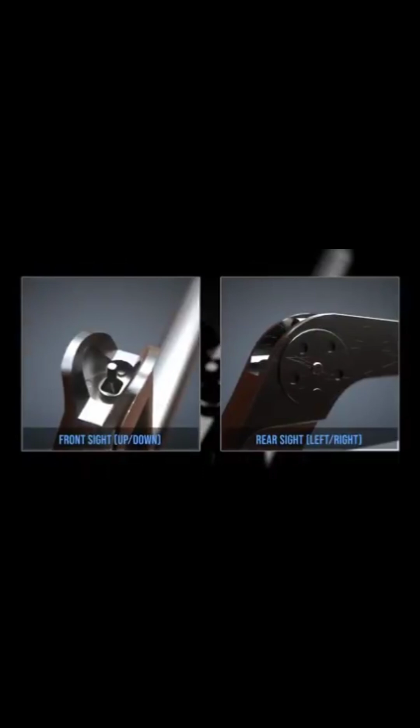A low-light level sight system for the M16 was also available. It featured a rear sight with a larger aperture of 7mm and a front sight with radioactive tritium for visible light at night. Newer versions have been equipped with a low-light level system and an elevation knob for better targeting.

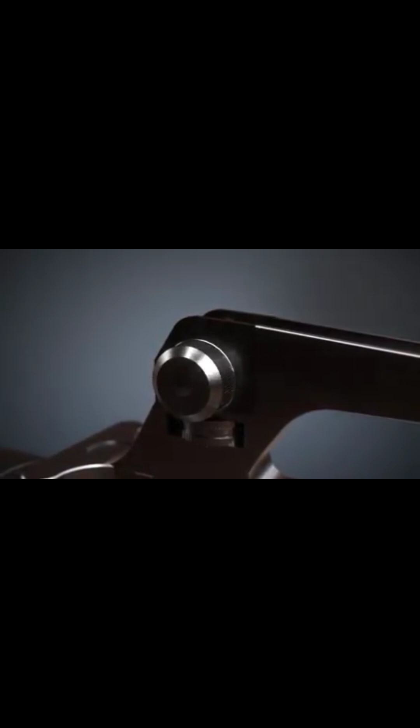Today, a lot of accessories are available for AR-15 style rifles. Fluted barrels save weight and dissipate heat easily.

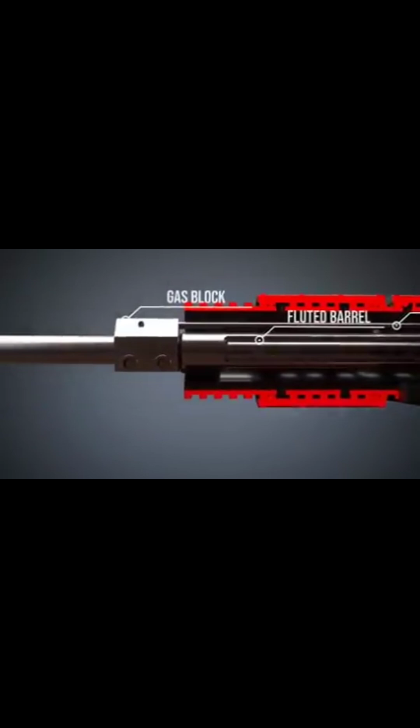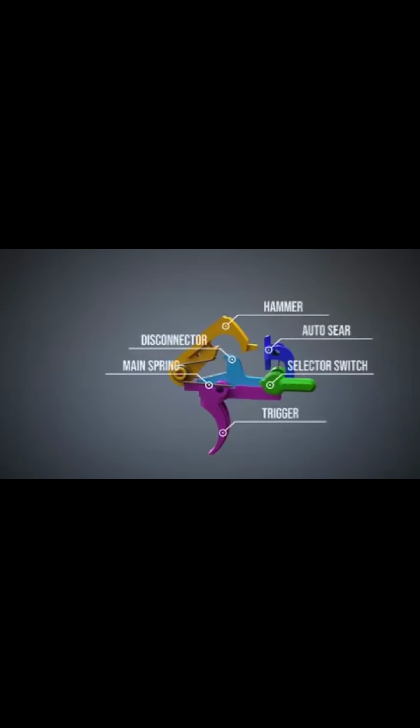Let's have a look at the M16's trigger mechanism. Initially, the M16 assault rifle could fire in semi-automatic and fully automatic mode. When in safe mode, the trigger cannot be pulled because of the selector's shape. When the selector is moved to semi-automatic mode, the recess in the bottom of the selector allows the trigger to move when it is pulled.

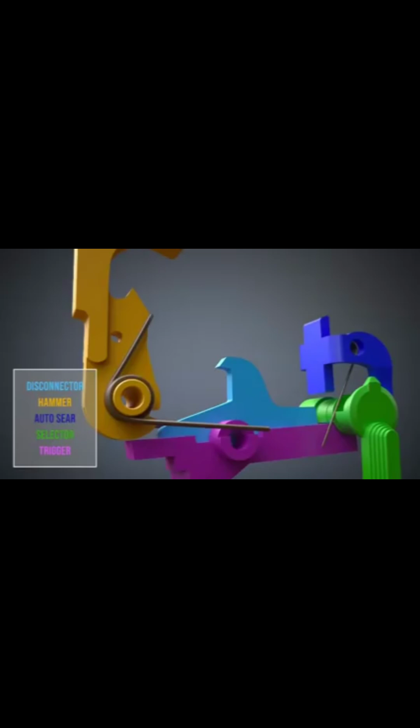As soon as the trigger is pulled, it releases the hammer. When the bolt carrier pushes down the hammer, the disconnector locks it in place. Before another shot can be fired, the trigger must be released so that the trigger sear engages the hammer again. In fully automatic mode, the trigger can move freely, whereas the disconnector stays at its position.

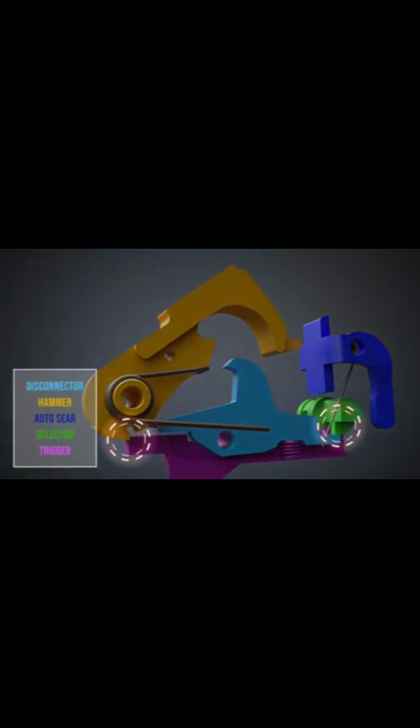The selector has a recess for the auto sear. The auto sear catches the hammer when the bolt carrier moves backwards. When the bolt carrier moves forward to chamber a new cartridge, the bolt carrier pushes the auto sear forward, releasing the hammer.

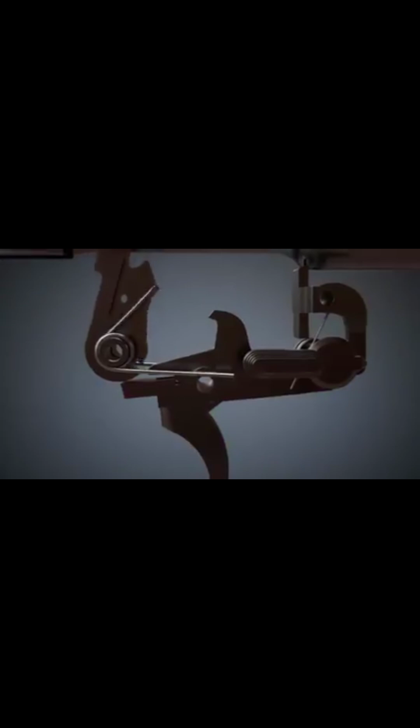Now, let's have a look at the bolt carrier. The bolt carrier houses the bolt that has several locking lugs, which are also called bolt lugs, and a cam pin. When the hammer strikes, the firing pin is pushed forward. The firing pin hits the bottom of the cartridge, which consists of the case, the propellant, the bullet, and the primer.

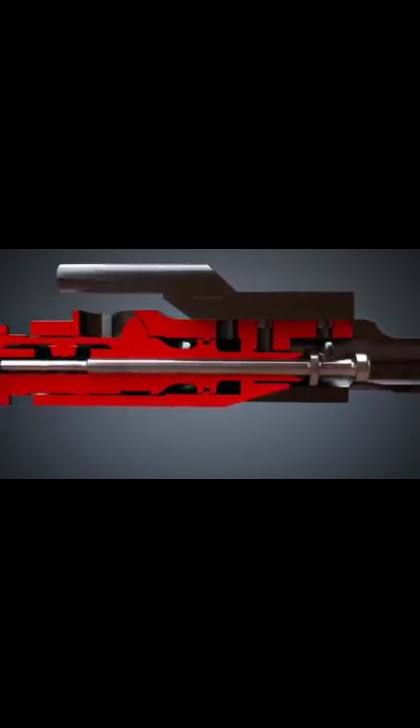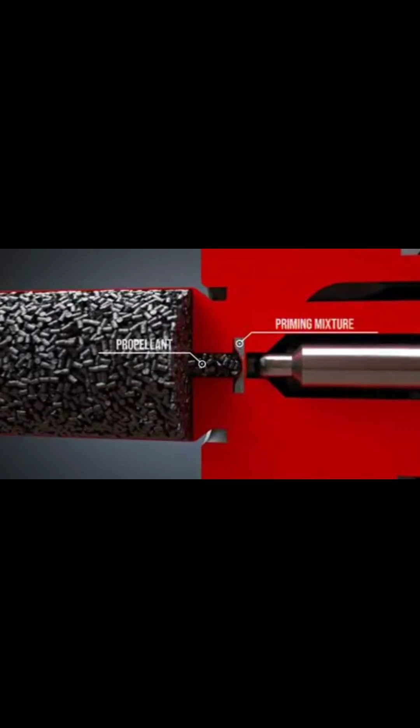The case of the cartridge is filled with the propellant. At the bottom of the case is the primer. The primer holds the priming mixture. When the rifle's firing pin strikes the primer cap, the priming mixture explodes, resulting in the ignition of the propellant.

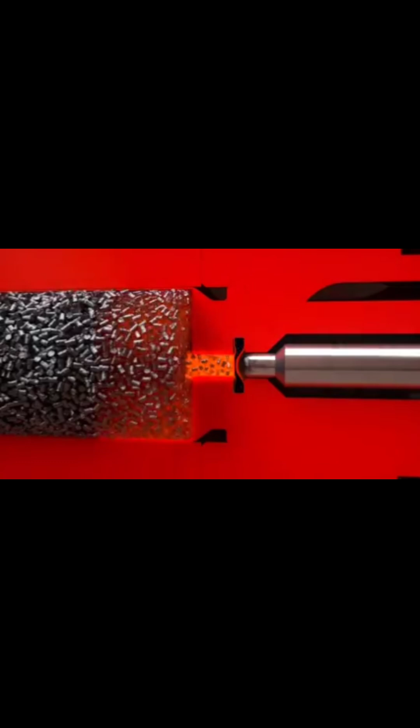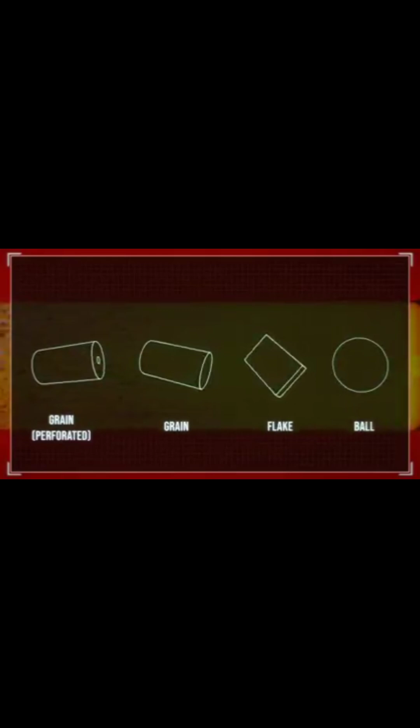The propellant is available in different shapes and mixtures. It is usually smokeless powder that reaches temperatures above 2,000 degrees Celsius. The pressure in the case pushes the bullet out of the case through the barrel to the target with a velocity of around 1 kilometer per second.

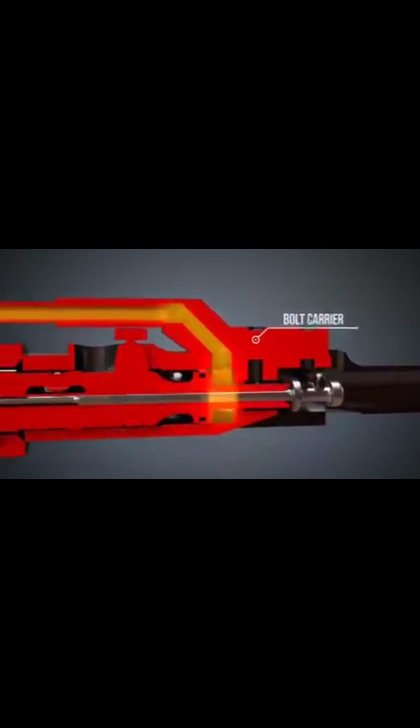The gas block and the gas tube connect the barrel with the bolt carrier. The pressure provided by the propellant is transmitted to the bolt carrier. Consequently, it is pushed back. The bolt is unlocked and moved backwards by the bolt carrier by means of the cam pin. The extractor removes the spent case from the chamber, while the spring-loaded ejector ejects it.

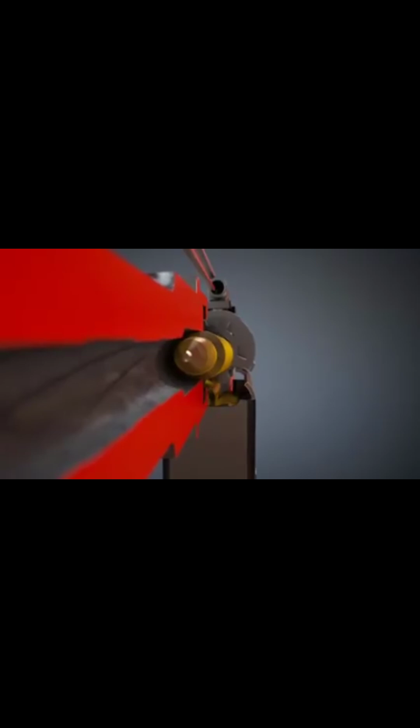The buffer spring is compressed and ready to release the stored energy. Consequently, it will push the bolt carrier back to its initial position. The bolt chambers a new cartridge. When the cartridge is fully seated in the chamber, the bolt is locked through the rotation. Let's see it again from another perspective.

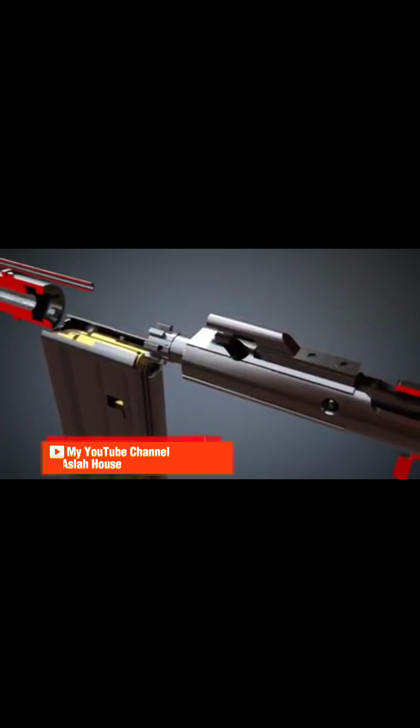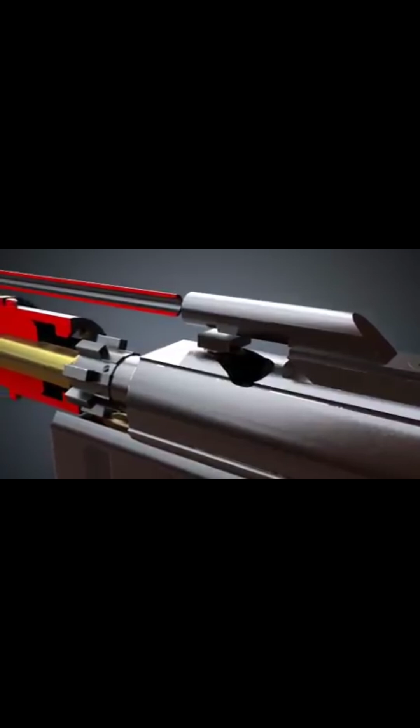The bolt pushes the cartridge into the chamber. When the bolt cannot move any further, the bolt carrier rotates the bolt through the cam pin. That way, the firearm can withstand the high pressure created by the propellant when the gun is fired. Let's see again the locking mechanism.

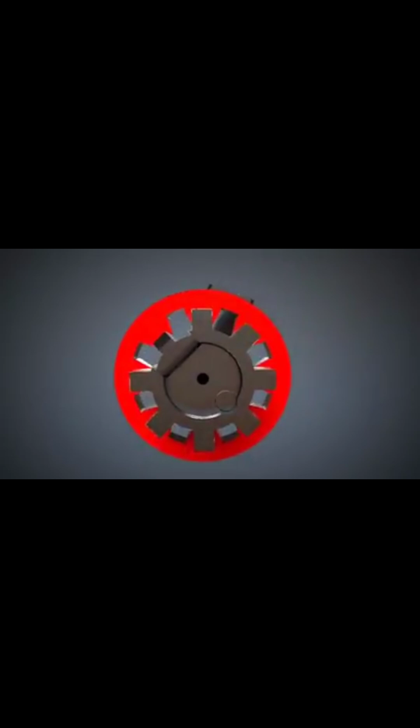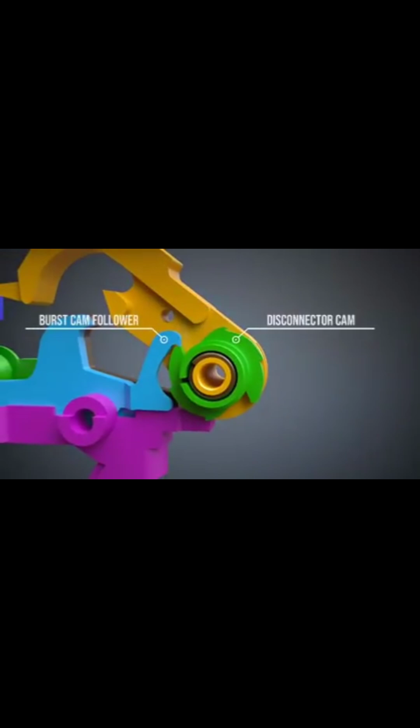In fully automatic mode, the rifle would release the hammer and fire. Because many soldiers would fire in fully automatic mode and waste ammunition, the burst mode was introduced. When the trigger is pulled, only 3 rounds are fired. This is possible through a spring clutch. The diameter of the spring clutch gets smaller or larger according to the direction of the force.

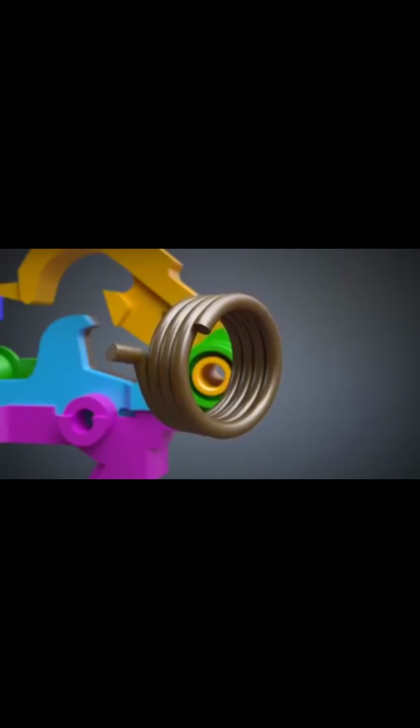So, when the trigger is pulled, the hammer strikes the firing pin. When the hammer is pushed back by the bolt carrier, the disconnector cam rotates thanks to the spring clutch. This is done 3 times until the burst cam follower reaches the stop notch. Because the stop notch is deeper, the disconnector holds back the hammer. So, the trigger must be released to fire again. Let's see it again from the side view.

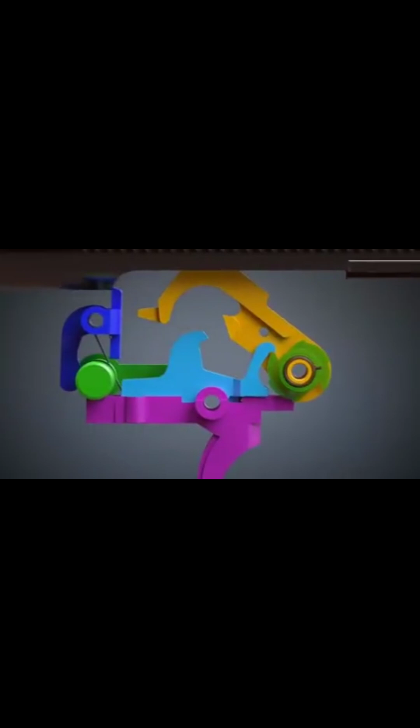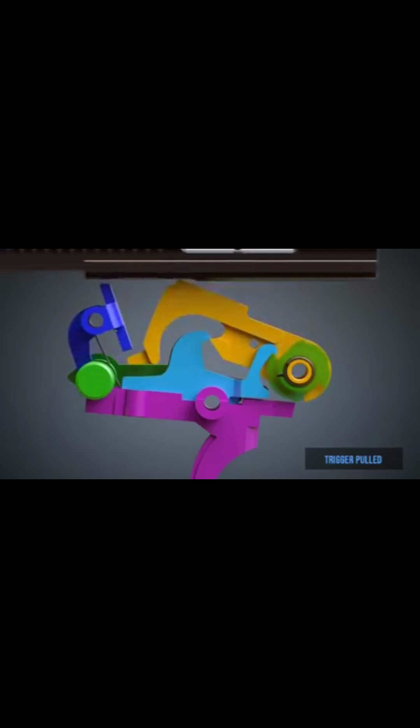The civilian AR-15 can only fire in semi-automatic mode. It does not have parts and recesses needed for fully automatic firing. Furthermore, the lower receiver does not have room for the auto-sear, and only a full auto bolt carrier can trip the auto-sear.

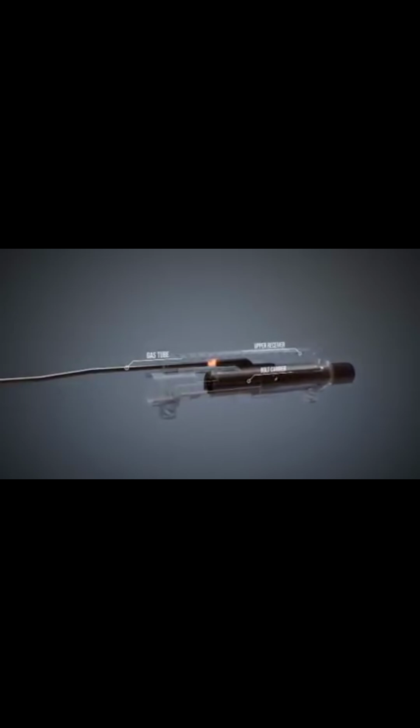The M16 and other AR-15 style rifles usually use direct impingement to cycle the action. So, when the bolt carrier moves backwards, residue can enter the upper receiver and other parts. This gunshot residue can become a big problem when the rifle is not cleaned regularly. Let's have a look at the upper receiver.

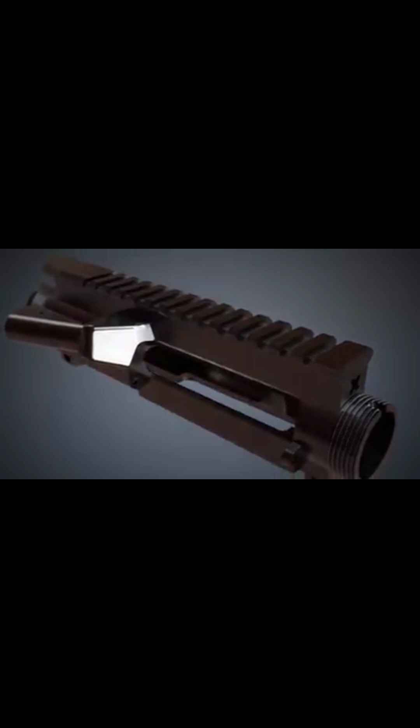When the rifle is not cleaned regularly, deposits can be found on the walls of the firearm's upper receiver over time. This can lead to increased friction between the upper receiver and the bolt carrier, so that the bolt carrier gets stuck and a new cartridge cannot be chambered.

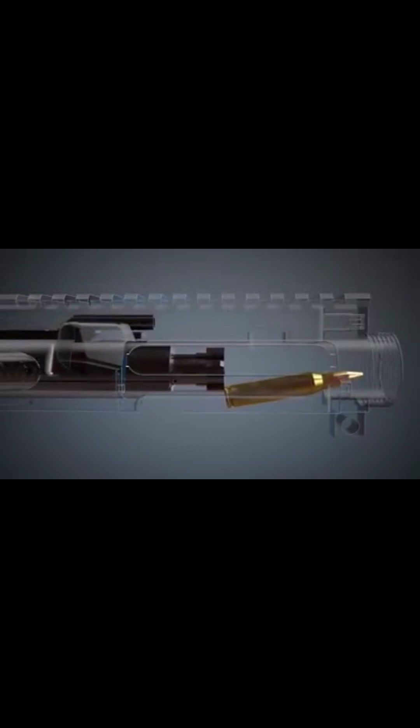Here, the forward assist can help. Pushing the forward assist plunger will move the bolt carrier forward, thanks to the notches. This can be done until the bolt is locked and the rifle is ready to fire.

Flash hiders are common on military rifles. Flash suppressors hide the flash so that the soldier is not blinded in low-light shooting conditions. They do this by dispersing the burning gases so that they cool much faster.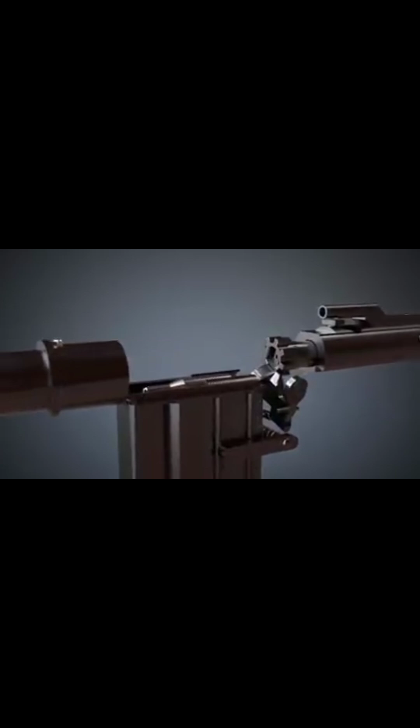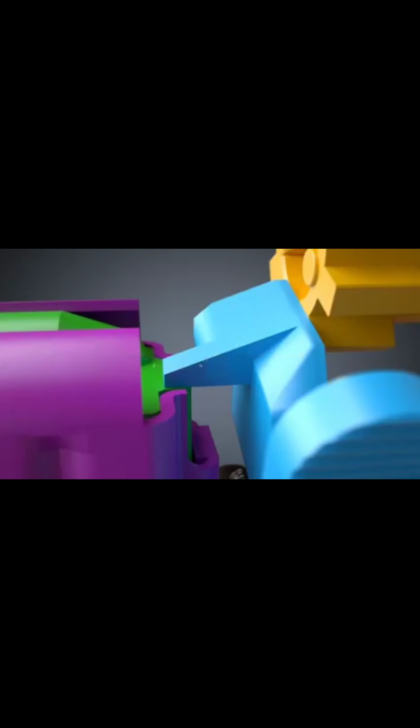When the magazine is empty, the spring-loaded magazine follower, which pushes the cartridges to the top of the magazine, pushes up the bolt catch. By this, the bolt catch locks the bolt. The operator can change the magazine by pressing the magazine catch.

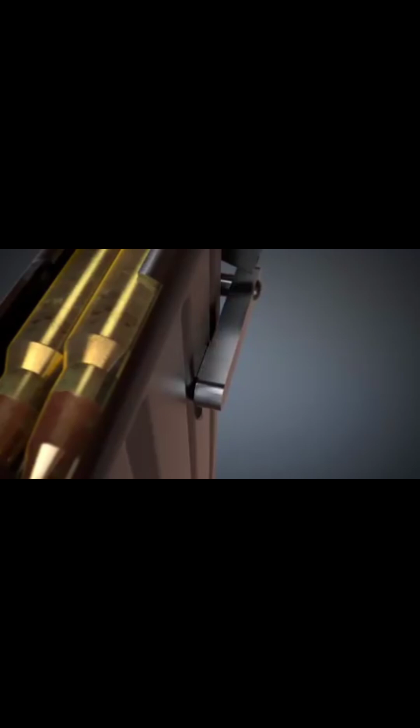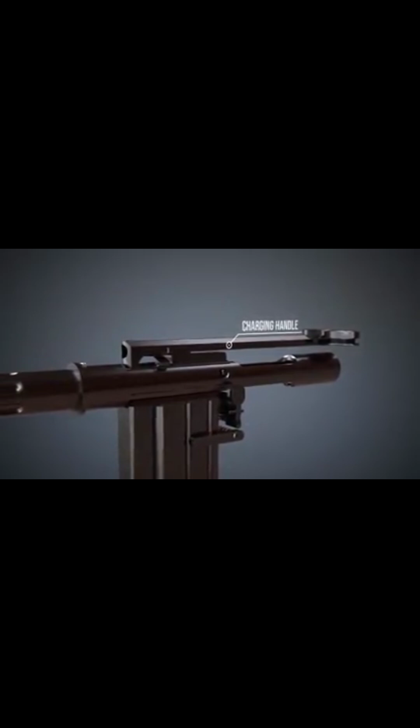Pushing the bolt catch will release the bolt. The firearm is ready to fire. Manually charging the gun is also possible. The charging handle allows the operator to move the bolt carrier to the rear. Releasing it will chamber a new cartridge.